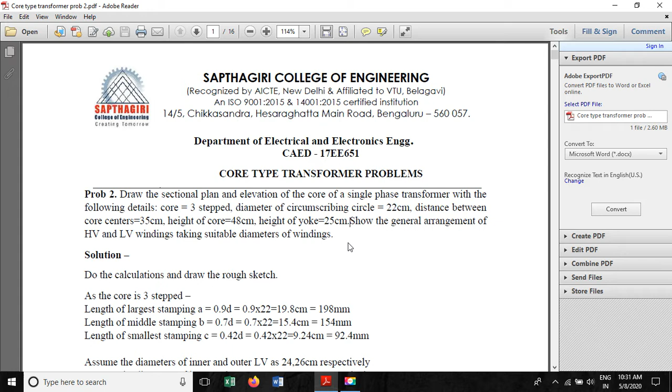Show the general arrangement of HV and LV windings, taking suitable diameters of the windings. So here you can observe the inner LV, outer LV, inner HV, outer HV diameters are not given. We have to assume them suitably. Okay, so this should be assumed suitably. As I told you, I have given this in the notes also.

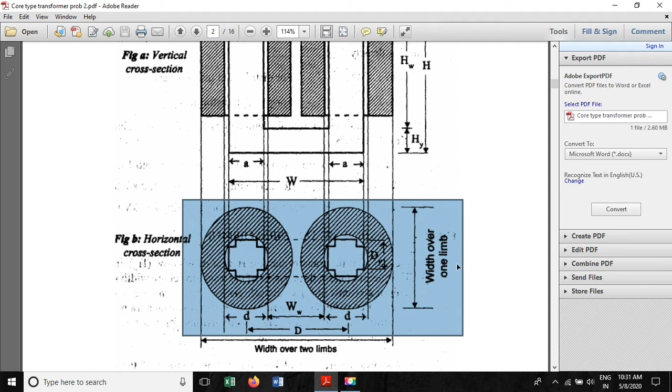So till now, this was the horizontal cross section of the sectional plan we were doing. Now in addition to the sectional plan, we also have to do the elevation. So in the elevation, we require the height of the yoke HY, height of the window, or here the height of the core is given, then again height of the yoke. So now we will try to do the calculations.

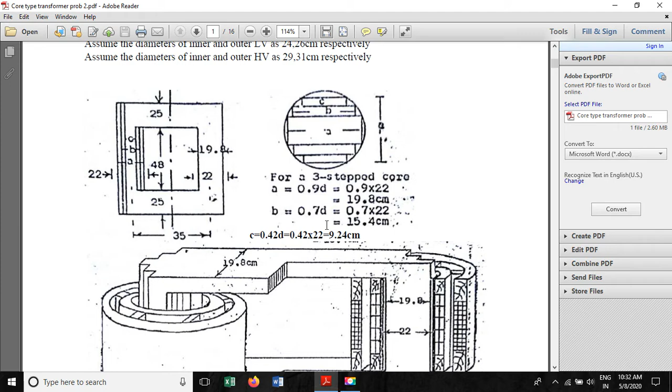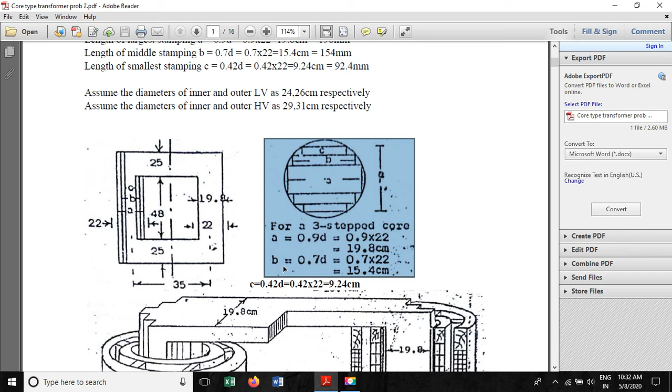So it is given in the problem as a three-stepped core. As it is a three-stepped core, we will have three steps A, B and C. The formula is length of the largest stamping is 0.9 times diameter of the circumscribing circle. Length of the middle stamping is 0.7 D. The smallest stamping is 0.42 D.

So once we calculate, we will get it as 19.8 centimeter. So if I multiply by 10, I'll get 198 mm. Length of the middle stamping, I'll get it as 15.4 centimeter. Into 10, 154 mm. Length of the smallest stamping, I'll get it as 0.42 into 22, 9.24 centimeter, into 10, 92.4 mm.

So the first and foremost step is we have to draw the stampings A, B and C. It is a three-stepped core. Here as the inner LV, outer LV, inner HV, outer HV is not given, we have to assume it suitably. Here I am assuming it as 24 and 26 centimeter for inner and outer LV. For inner and outer HV I am assuming it as 29 and 31 centimeter respectively.

So I'll tell you how to cross check this again. This is random, you can take it anyhow. Okay, this is the three-stepped core. So here they are showing the right half in section; the left half is not in full section, it is projection.

But in the question we have asked, draw the sectional plan and elevation, full we have to draw. So whatever is in the right, the same thing should be copied to the left portion. Now we'll open the AutoCAD software.